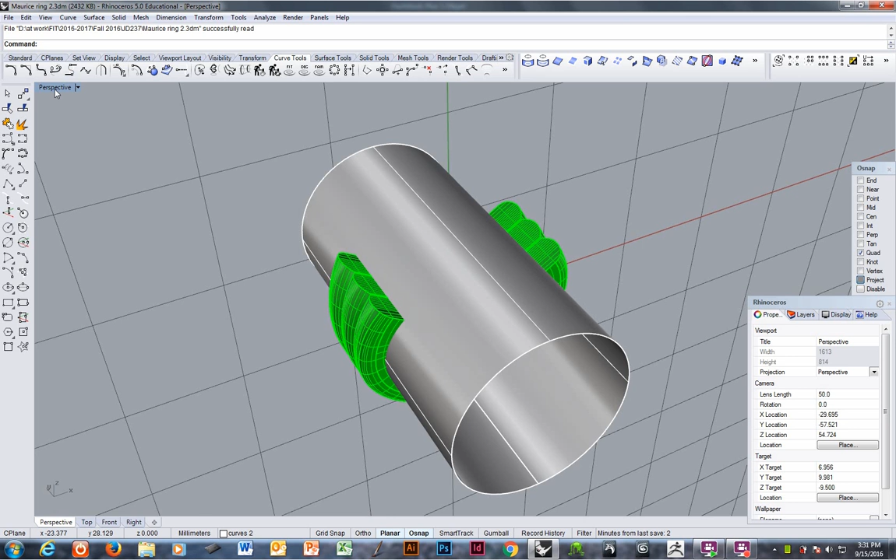Adding another installment to our series of tutorials for Rhino, continuing on with our project, the Maurice ring. Okay, we don't need the ring bore. We have our shank fairly well resolved. I'm going to move that onto a storage layer.

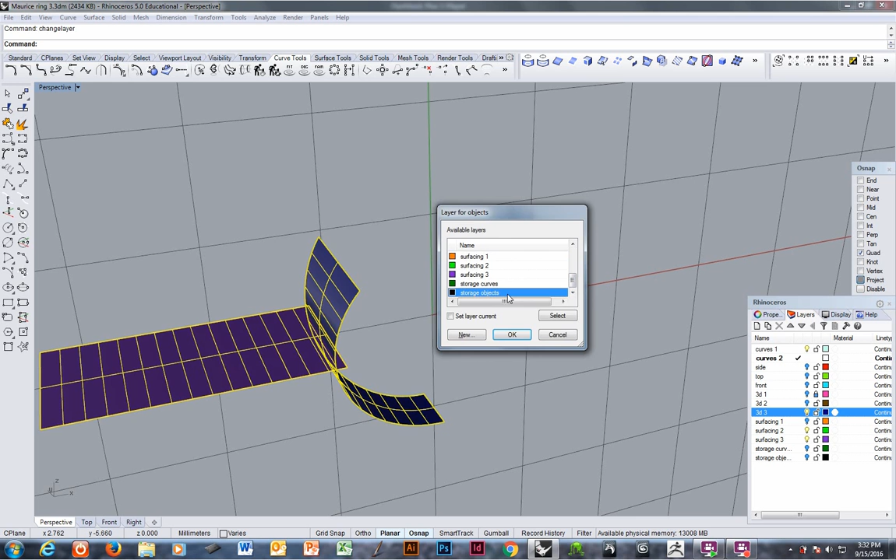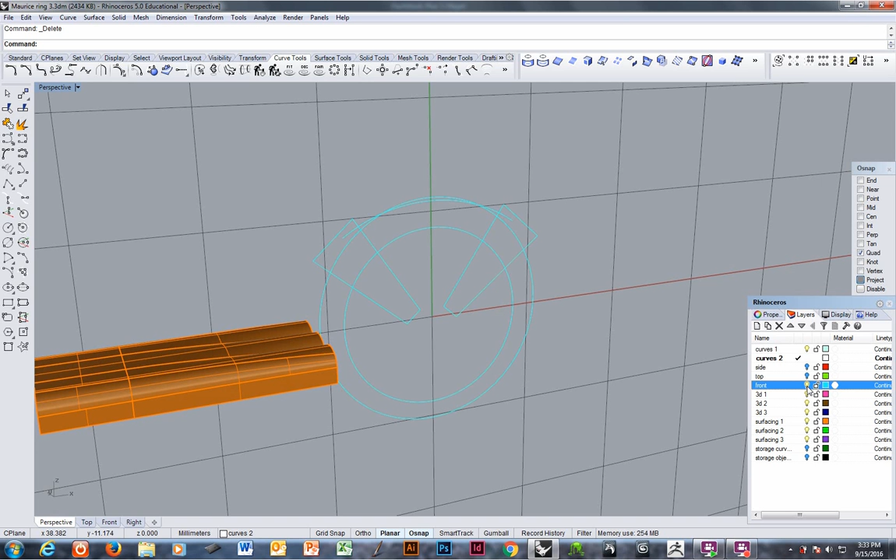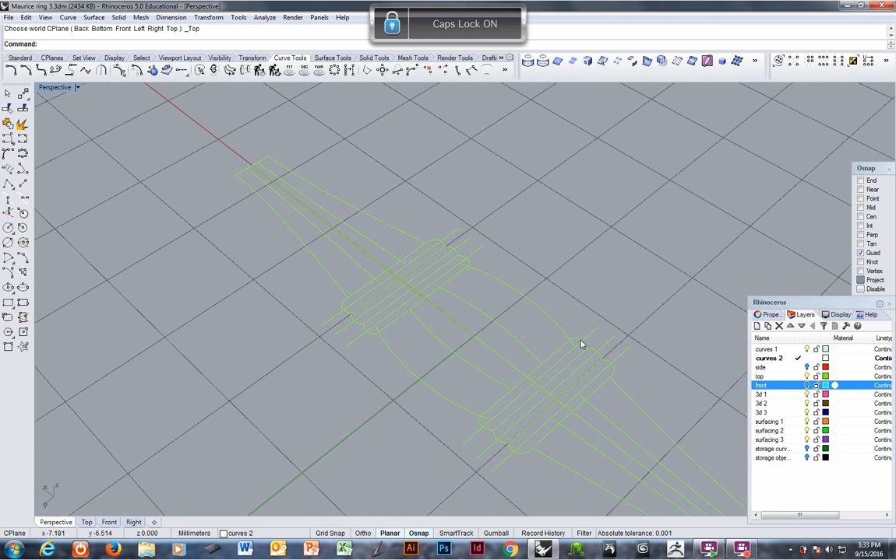The next element we're going to draw is the center section, the head section. We're going to do it in much the same way that we did the other. I turned on the previous curve so I could see a relevant height. Okay, in fact, an easy way to do this is going to be to do an orient command. I want a copy and I want it to scale 3D. Grabbing the endpoints of that section and the quadrants of this simple loop.

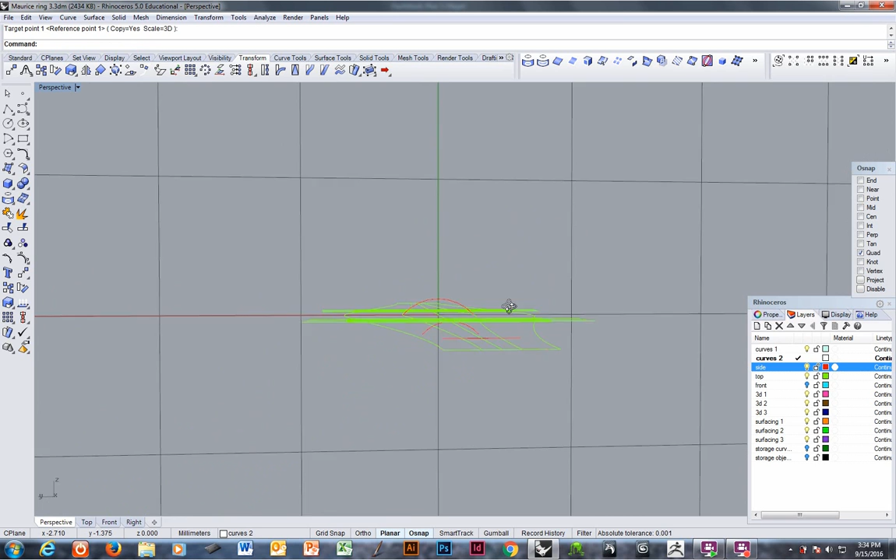That is the same shape, just enlarged and moved in position. Remember, that's what orient will do. Orient will copy, relocate, and scale something all at the same time. Powerful transform. I'm going to look at that in connection with the other flutes and see if I think that is tall enough. I don't think it is. I think I'm going to want a little more extreme.

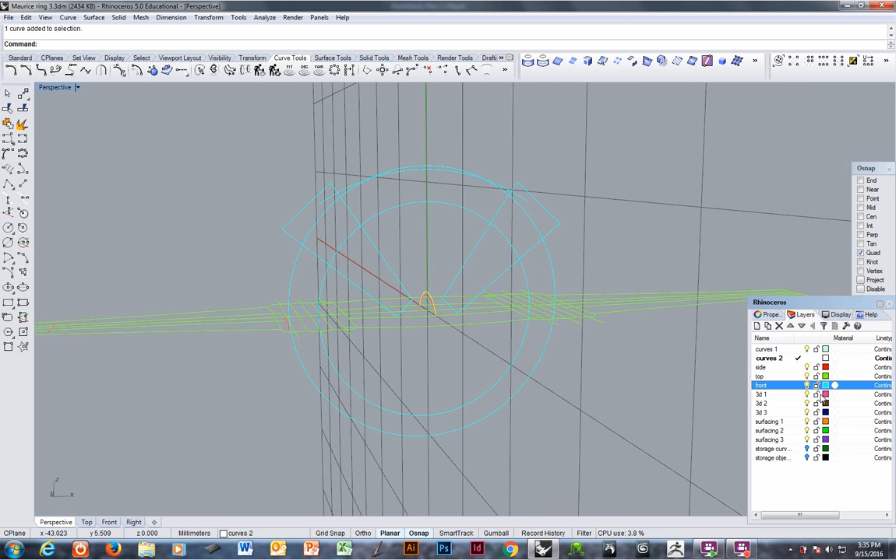I have to be careful though, because the taller these are, when they come into here, the higher this is going to have to be to grapple them. And if this has to be higher to grapple them, it's going to be even higher over here. And that is one of our concerns, the differences here. So actually, I'm not. I'm going to leave that with the original. That's fine.

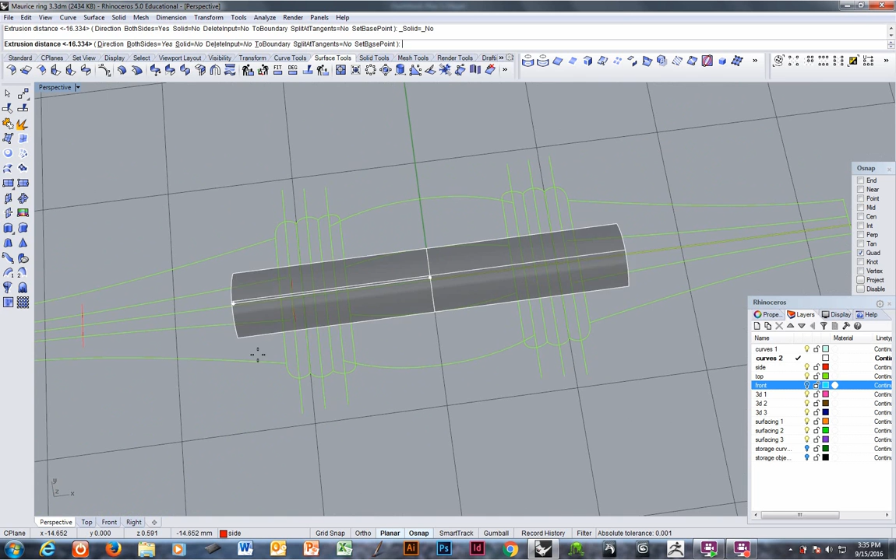I'm going to go ahead and extrude that straight, both sides. Yeah, my bad. I'm going to try and extrude it from the top C-plane. It may not work. The last C-plane, the right C-plane, was better. Yeah, but since it's a planar curve, usually if it's a planar curve, Rhino will forgive. Because I want to make sure that it's big enough to tuck into this cleat well.

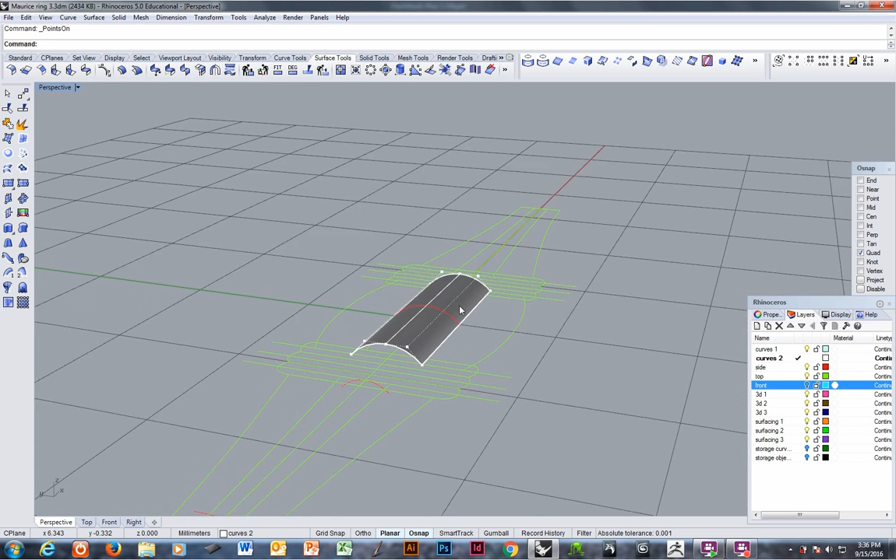I'm going to explode that. Rhino 5, when it makes an extrusion, it actually creates a separate kind of object class in Rhino, which we don't want, because we're going to want to be able to alter this. I want to look at the point structure. It's not bad. I'm going to take a look at the math, F5.

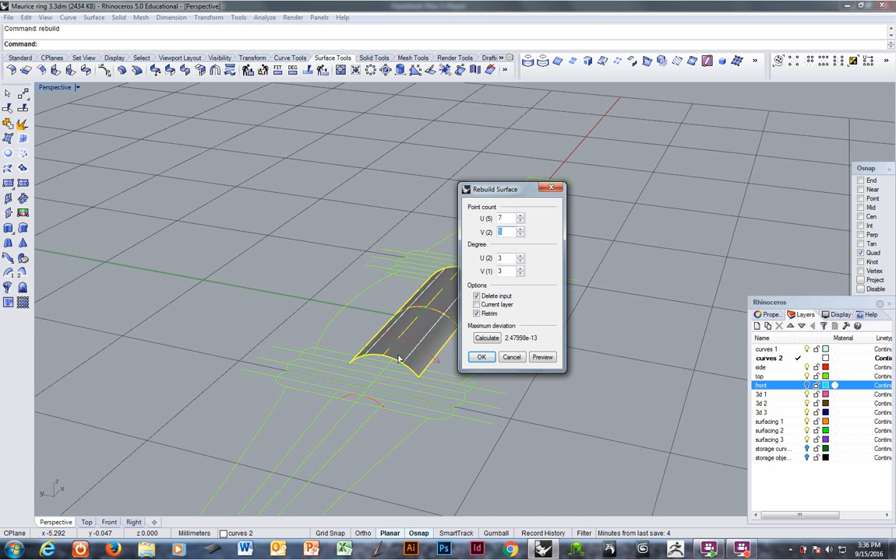It is second degree curvature, which I don't want. I want third degree. No, I mean, it is a third degree. Okay. No, it isn't. It's a second degree. So I want third degree, third degree. I want the U direction, which is coming across this way. I'll make that 7 so that it holds. And in the V direction, that's coming from here to here. I want a center line, so I'll make that 3, which is good. That's what it already is. Essentially the same surface, but with a little more friendly math, because we're going to be transforming it quite a bit once again.

Actually, I already have these outlines coming to this first curve. I'm going to go ahead and scale this back to match, non-uniform scale. 0 is the beginning of my scale. I will grab the end of this extrusion and the end of that cut curve, and just 1 for Y and 1 for Z. There. That'll be the same length as this, which will make my life easier later.

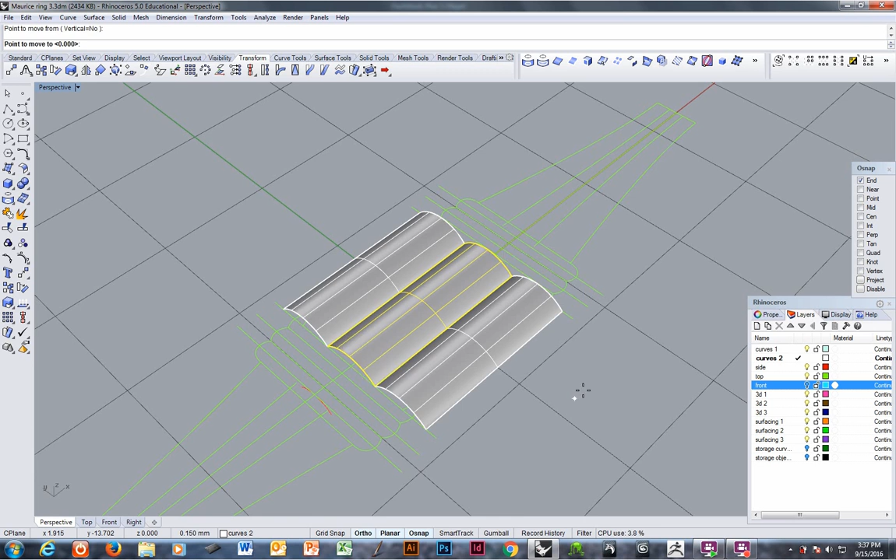Going to make copies with history. And I'm going to check my history. If I move the center one, the other two should follow along. Okay, very good. So there's my basic surfacing for the center section. And like we experienced before, we're going to need to make a fairly sophisticated flow kit to work with that.

We know that we want the base surface to be as wide as this. So I'm going to go ahead and just start drawing the outline. Line both sides, starting from the quadrant. Shift key. Go ahead and mirror that over. And I'm going to

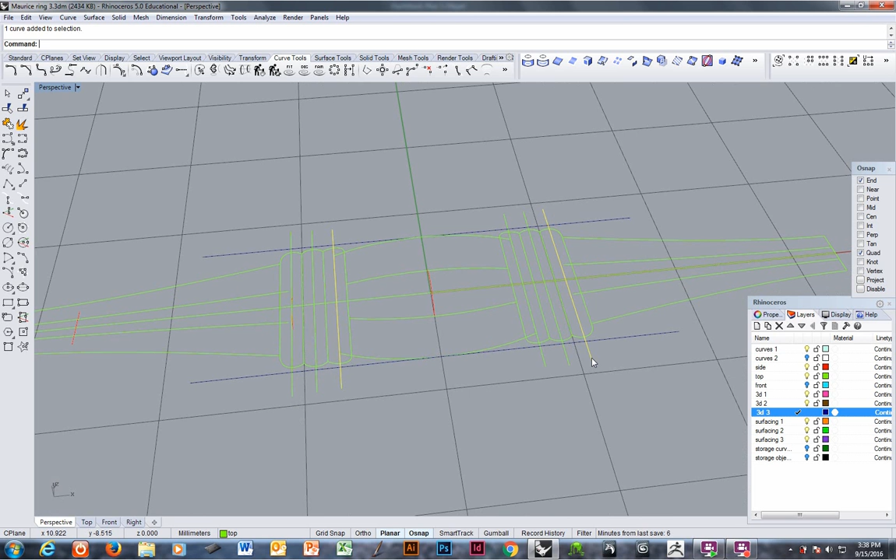grab these two. I want a copy of them on this dark blue layer, so I'm going to copy and paste and change layer to dark blue. Change layer, remember, is called Control D. Copy is Control C, paste is Control V, change layer is Control D. Turn off this top view now. And trim this up using fillet.

That's the shape of my initial surface. I'm going to offset it a millimeter so that I have a flow surface that goes beyond what I need all the way around. In fact, I'm going to go 1.2. Throw away the inside one. This is the curve I'm going to use to make my flow surface.

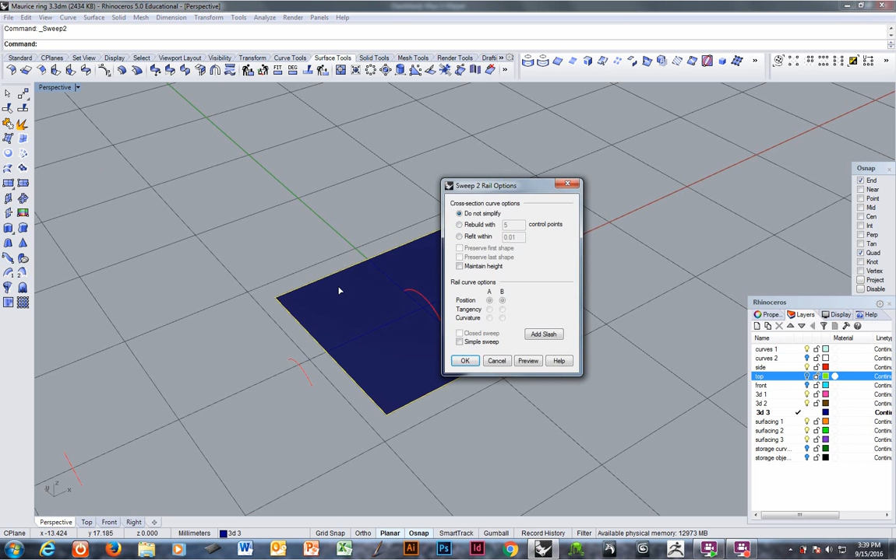So explode it, bi-rail sweep it, throw away those curves, and that's my flat surface, my base surface. Now I'm going to make my three-dimensional surface, my target surface. And to do that, I'm going to do the same thing. I'm going to ungroup these, Control-Shift-G, so I can select them individually. I'm going to do the same thing I did with the other, with the shank.

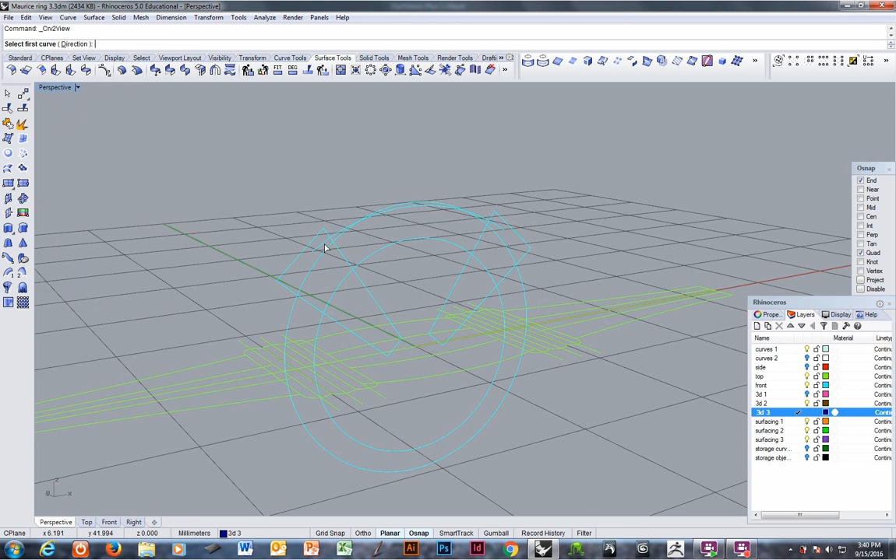Curve from two views, here and here. Curve from two views, here and here. Okay, that gives me what I want. And I do want to have a surface up here to look at for reference, so I'm going to make that. Going to extrude it, front C-plane, extrude both sides. Turn off my two drawings.

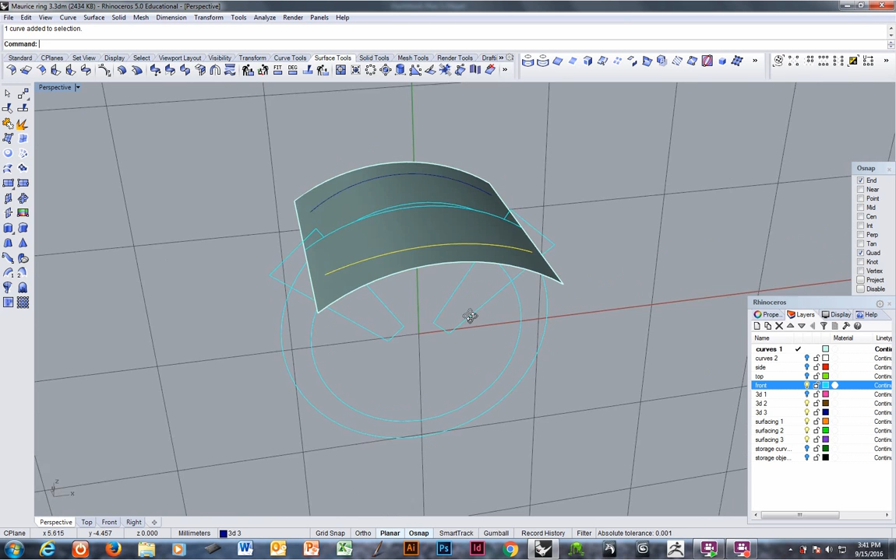Okay, now interestingly enough, these don't reach. And that's okay, because I made that center curve in the view an approximate, so it should be fine. I do need a curve to close these off, though, so I will get that, extract iso curve, other direction, T-enter to get the other direction, toggle, and snap, and snap, trim, trim, trim.

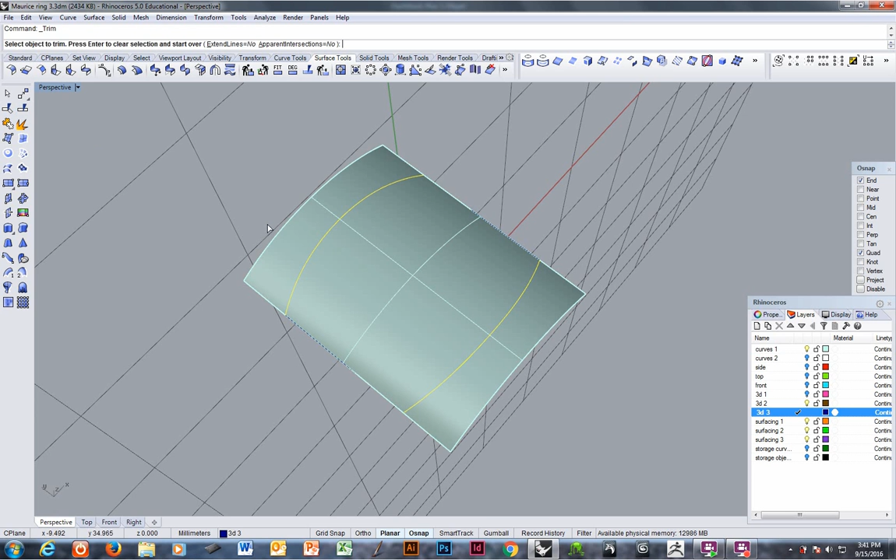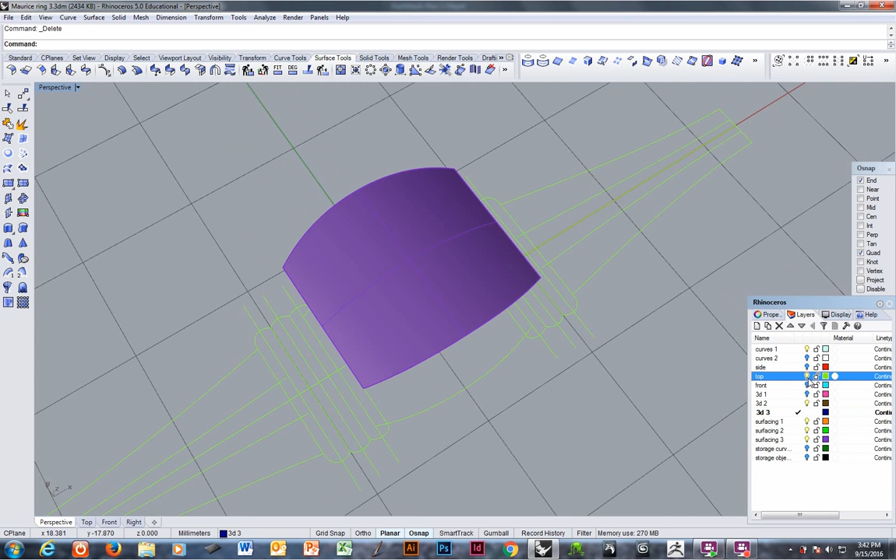Okay, and that will be a good way to measure how close I am to the shape I initially envisioned when I did my drawing. I don't really need the curves anymore, so I'll control that and then deselect the surface. And then going back down to my flat. I am going to offset this 1.2. Going to offset this 1.2. And both of these 1.2.

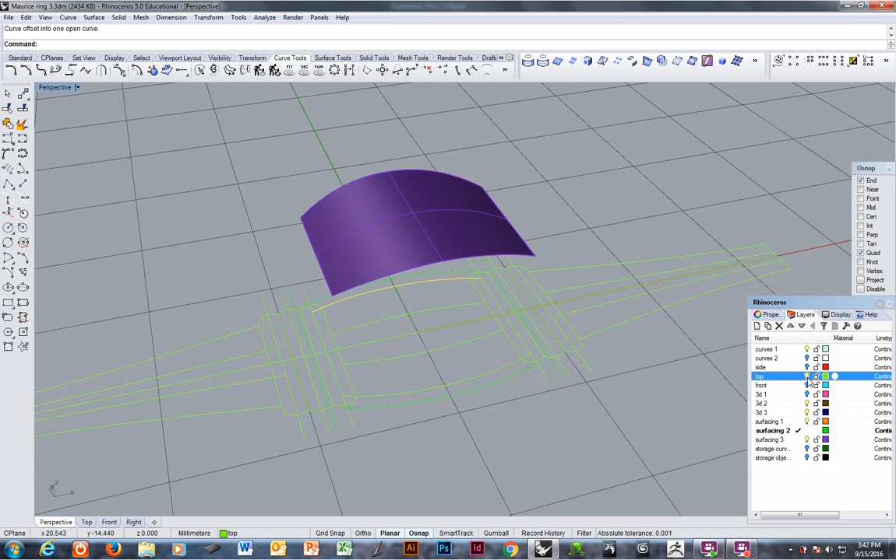Use my fillet. Make sure that these are just one curve. I'm going to explode it. See, those two curves are 6 segments. That's not good. I'm not going to worry about it right now, though. Go ahead and join these into a closed curve. Do my curve from 2 views. This curve and this curve.

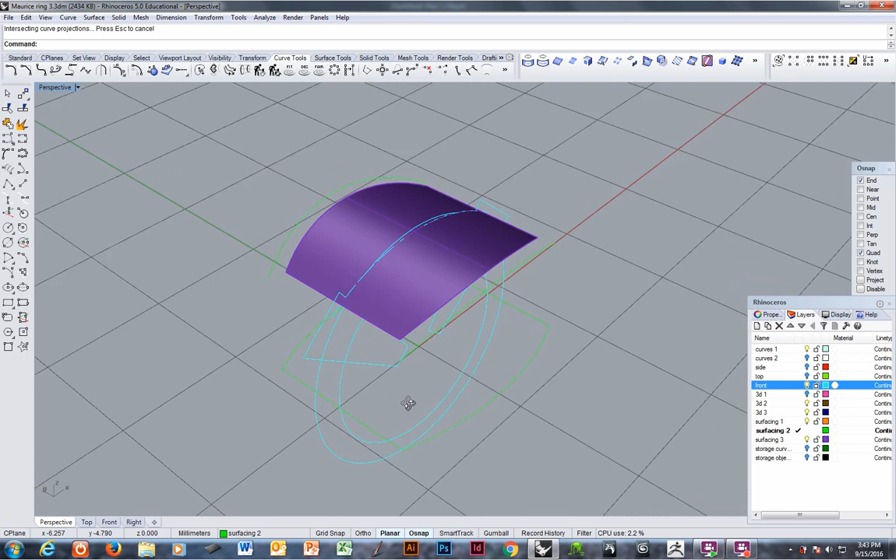You will see that it did not bring the rest of this. It's because it's not long enough. This curve isn't long enough to give me those extra pieces. I need them to be long enough, so I'm going to do an extend curve. Select both of these. Curve, extend curve. Those are my boundaries, so now I just select the curve to extend, which will be that. Explode this. Good, it cannot explode a single segment. Just wanted to make sure I had relatively simple math still.

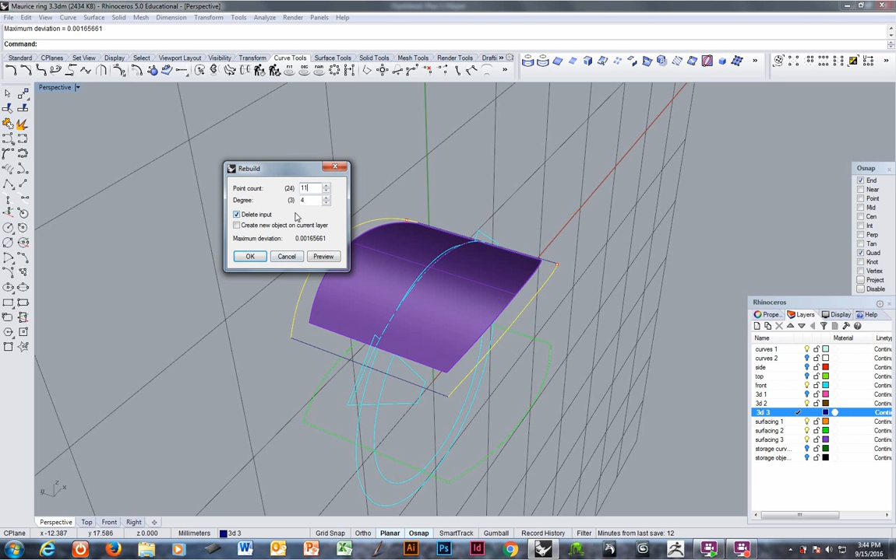Okay, again, curve from 2 views. There we go. This I'm going to explode. There are 5 segments. I only want 4, so I'm going to deselect these 2 and join those together. 3 curves joined into 2 open curves. So one of these was a polycurve. I'm going to rebuild it. All I care about is that there's a control point in the middle, so I need an odd number. 11's fine, and I'll have the degree be 4. That's fine. Looks unchanged.

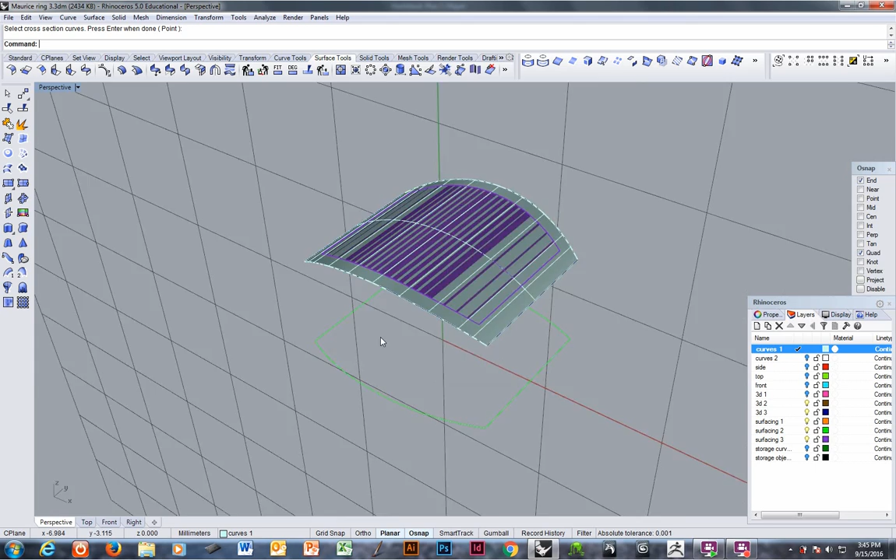Going to do a bi-rail sweep. Oh, hang on. Bi-rail sweep. Rail, rail, cross section, cross section. That looks good. Turn off the guide.

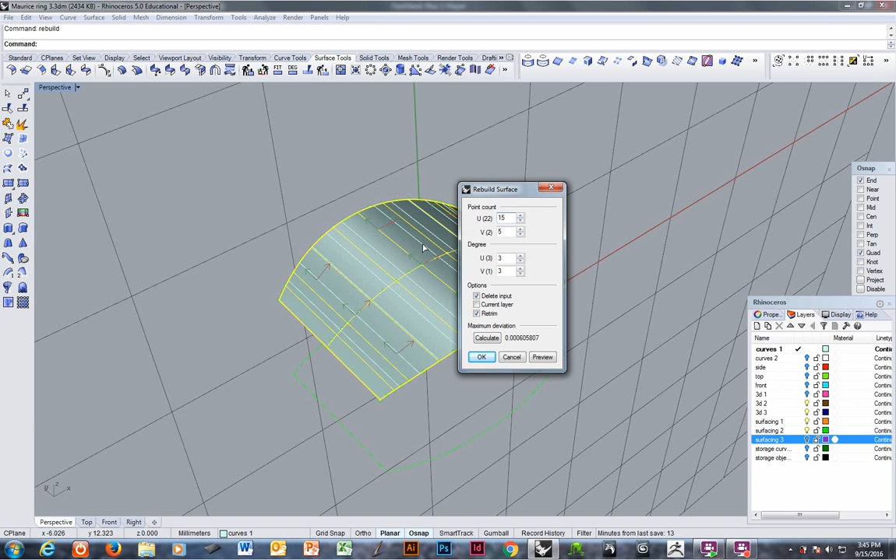Rebuild, so we have even control points. I like the 22. We'll keep that, except I need it to be odd numbered. So I'm actually going to go 19. 19 should be more than enough. Actually, I'm going to take that down to 15. I do want a control point down the middle, so I'll keep that 5. 3 and 3 is okay.

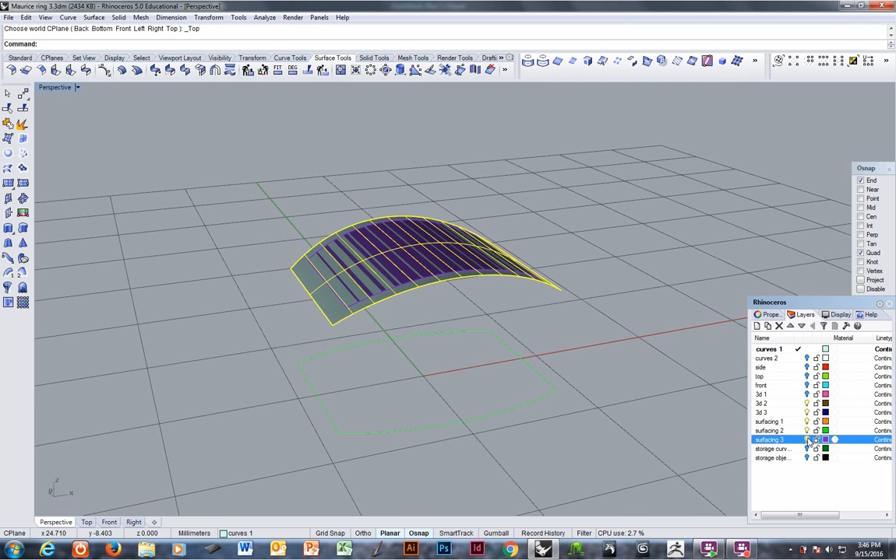Take a look at it from the front, and then undo, redo, to see how much I changed that. Control Z, undo. Looks the same. Control Y, redo. Okay, so that rebuilding didn't change the curvature, which was important to me. All right, let's see what we get. Our flat surface. It's right here. I'll put these on the same layer.

My 3 surfaces. Now, here's the interesting thing. I was supposed to have this offset by 1 millimeter, so that makes me doubt that this surface is legitimate. There should be one that is offset 1 millimeter. Okay, there is not one. Okay, that's very telling because I was supposed to do a millimeter all the way around, and apparently I didn't. Apparently I did it. I don't know where that went. I was certain I had.

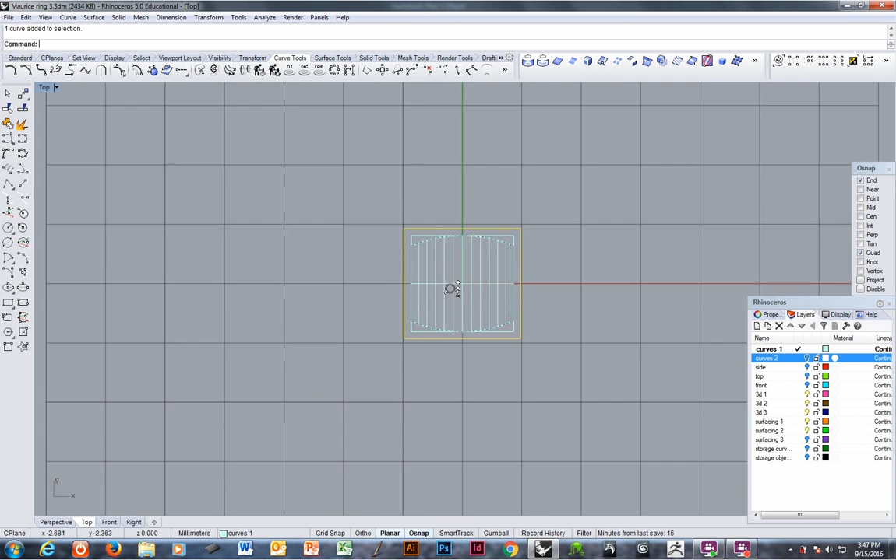Okay, well, it's very important that I do the offset of a 1.2, so curve, offset, 1.2. Except for I don't want that one, I want the straight-sided one. So, duplicate border, offset, delete. This is the curve that I want. If I look at it from the top view, interesting. No. I've got to pause. No, that's right. That is right.

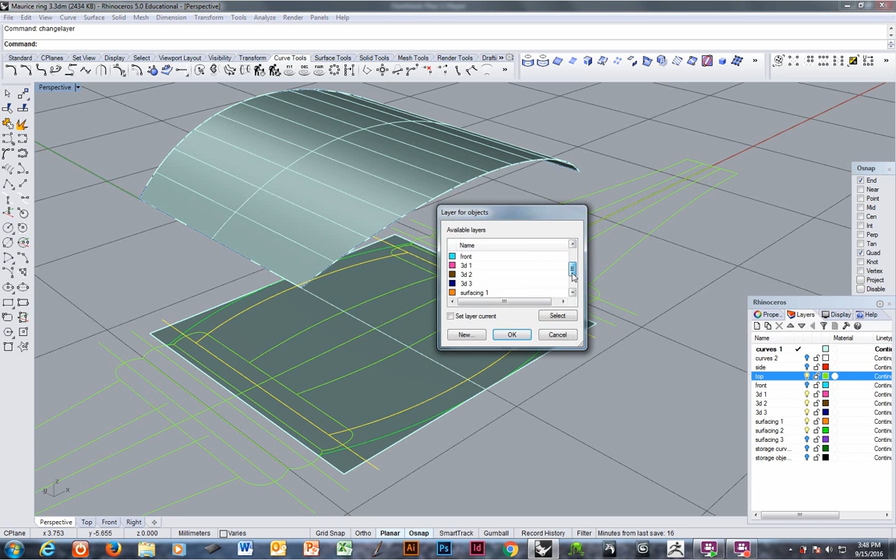Let's take a look and see why I'm confused. Okay, this has already been offset the millimeter, which means this has already been offset the millimeter. This is fine. Sorry for becoming confused, but there's a lot going on, and that's easy to do. Can you see how this was the original shape, and how it has been offset both in the curved version, which I brought up here. It's also been offset as a straight square all the way around. So it's fine.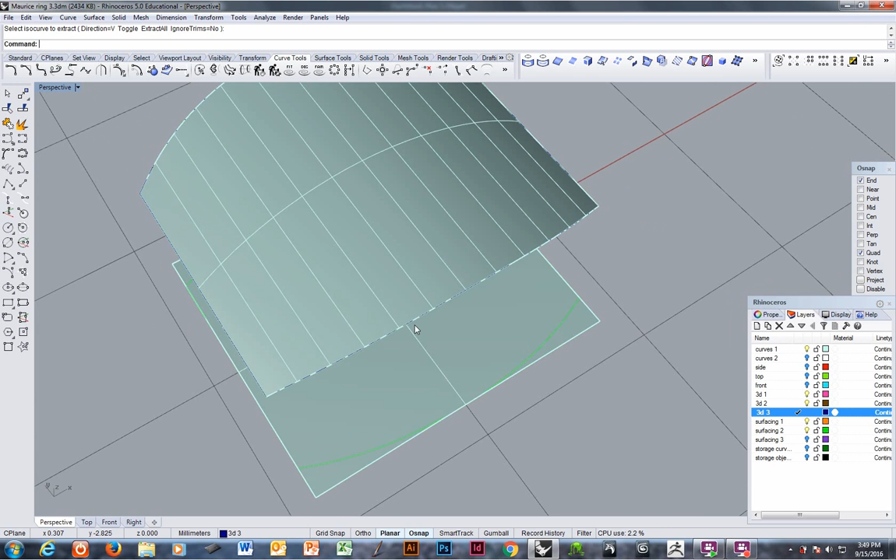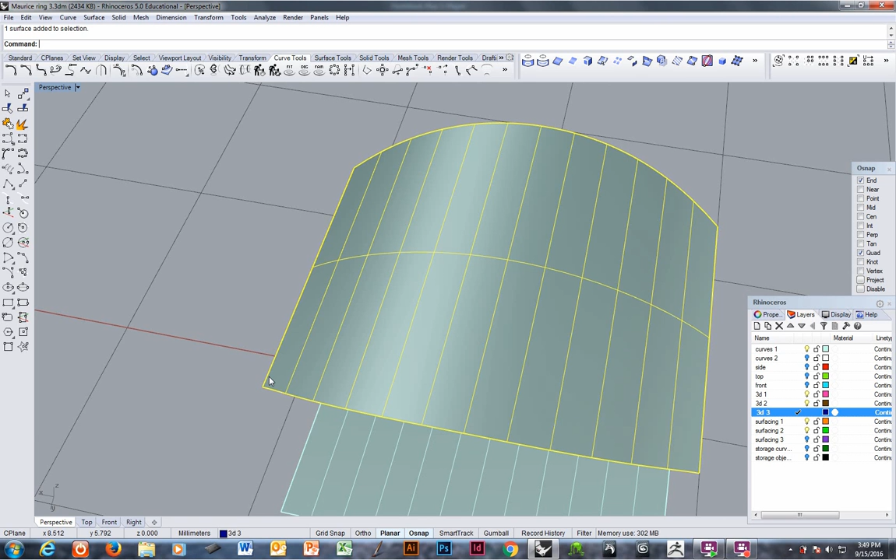Okay, so this is good. I just need to make sure that it matches the math. So first thing I want to check is the grain, the U and V's. U is horizontal, or short widthwise. Okay, same. I want to rebuild this to the same curve math, so F5. It'll remember what I last did, which is what I want, so these two are the same. Good. I'll hide these curves in case I want them again. Group these and hide them. Okay. There's my flow kit.

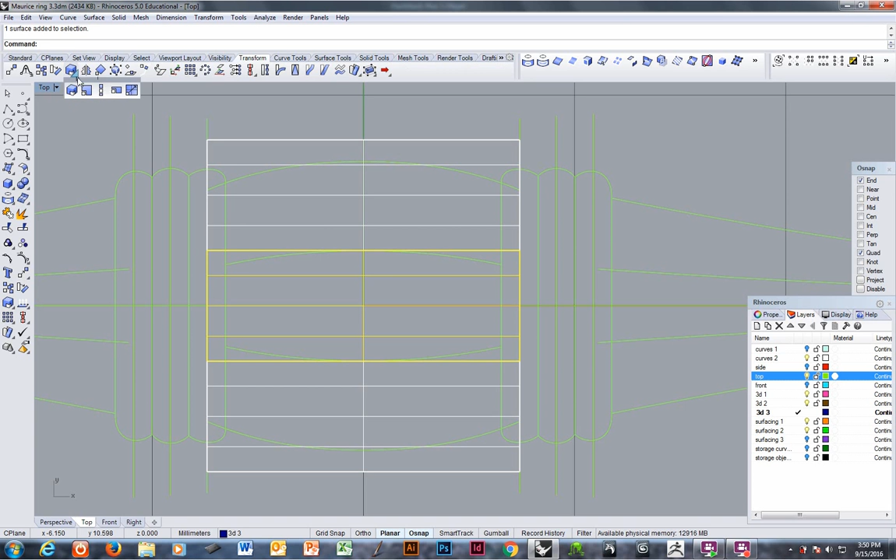I guess what's scaring me is that compared to my drawing, those seem awfully wide. And they are. Okay? They're awfully wide because I made the center one wider than the sides. Okay. Going to my top view. Non-uniform scale. No change here, so 1. And I'll have to do this a little bit at a time until I get what I want. Okay, that's not going to work. This is going to narrow them up.

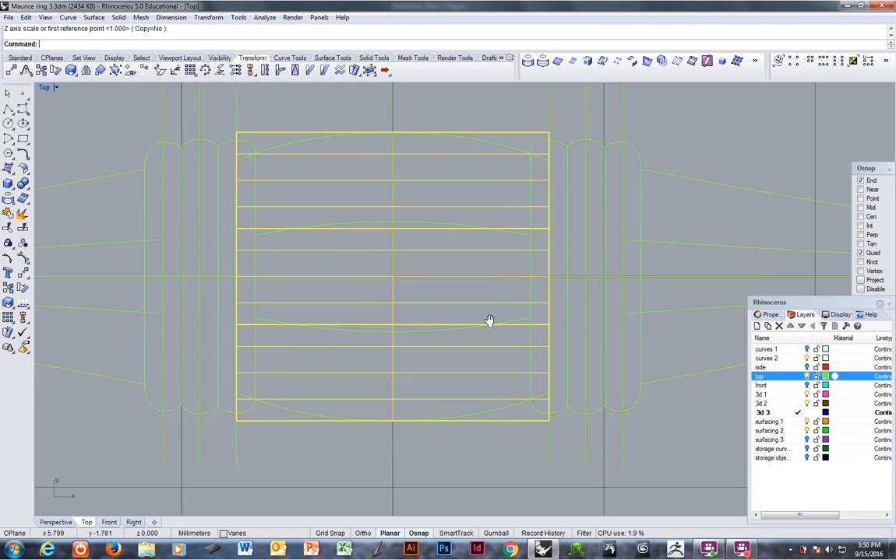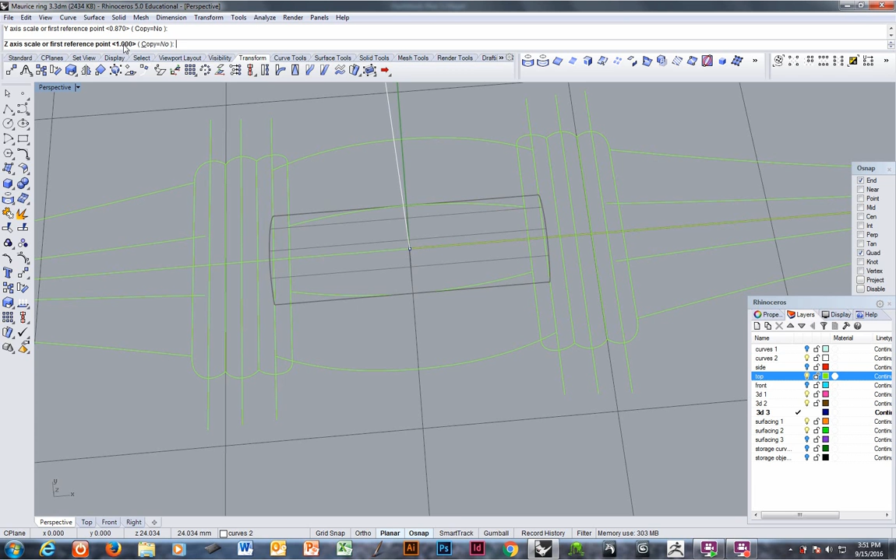So, I'm going to non-uniform scale all of them. One and quad. Z is 1. I know, I broke history. That's fine. That's what I want. Okay, so now that I have that, I'm going to undo, throw these two away, scale this one again using the same numbers, origin point 0. Remember, it will remember what you used last, so it's 1, no change, but this side is 87%. Z is 1.

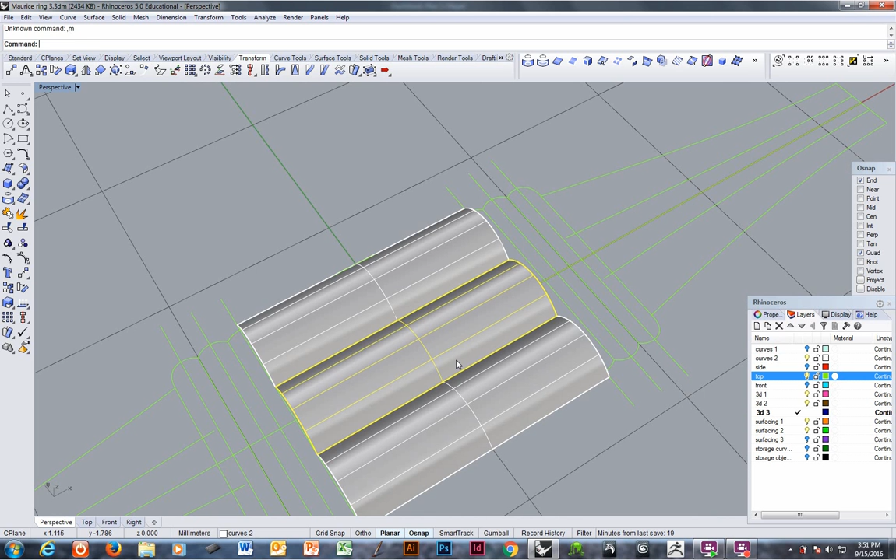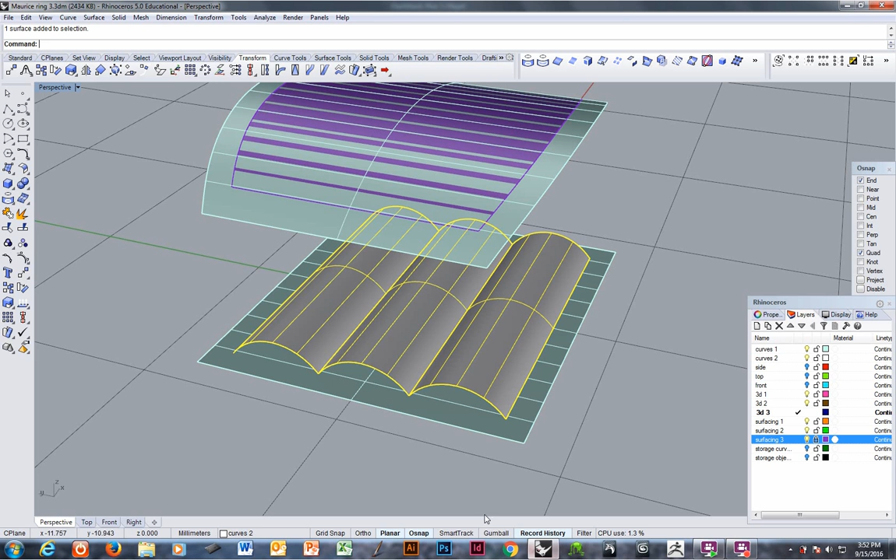And when I copy this with history, and again, I should have something much better. And then if I move this, the others should follow. Yep, history's good. All right, small correction. And now back to my flow kit. Remember, the dark purple is what I want it to look like. So, record history, flow along surface, select a common corner, and there we go.

Now you can see that mine is actually a little more tapered at the very end than what I wanted in my original shape. Going to see how much that matters against the drawing. Actually, it looks good. The only place it matters is down inside of the collet, and I don't think I really want to change that. Oh, unless, hang on. No, it's off. I need to match that curve. Alright, so to do that, I'm going to change this onto a different layer just so I can turn the base off.

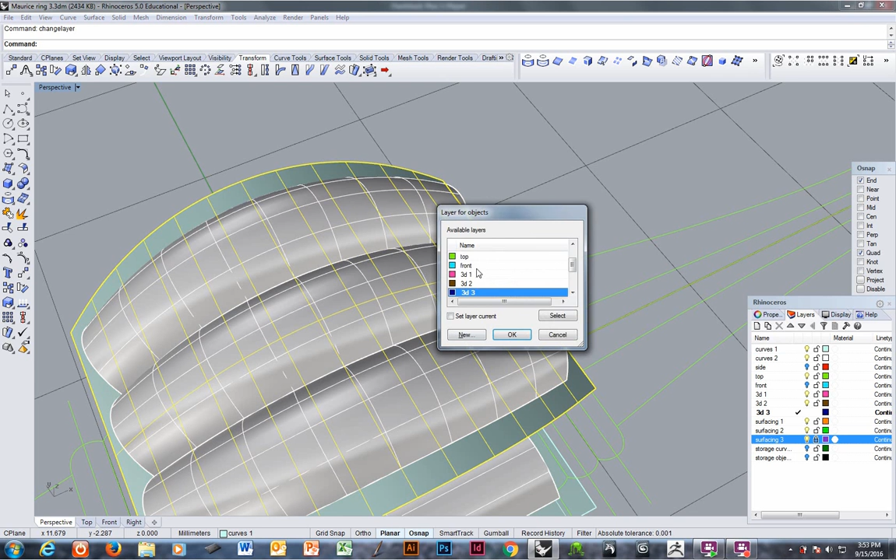Since history is attached, I can turn on the control points here. And I'm going to do some control point editing. I'm going to start with from where I see it departing, which is right here. Here it looks good. I'm going to grab it on both sides. That's why I wanted a center point, so that I could have it be symmetrical. Origin point is 0. I don't want to change this direction, so that's a 1. I want to change this direction. I'm just going to do a little bit. And then 1 for Z.

Enter. And I'm going to look and see what that did. Can you see how it took it in quite a ways? Actually made kind of a kink. I don't want that. So, undo. Try again. Nothing here. This was 98%. I'm going to do 0.99 and then 1 for Z.

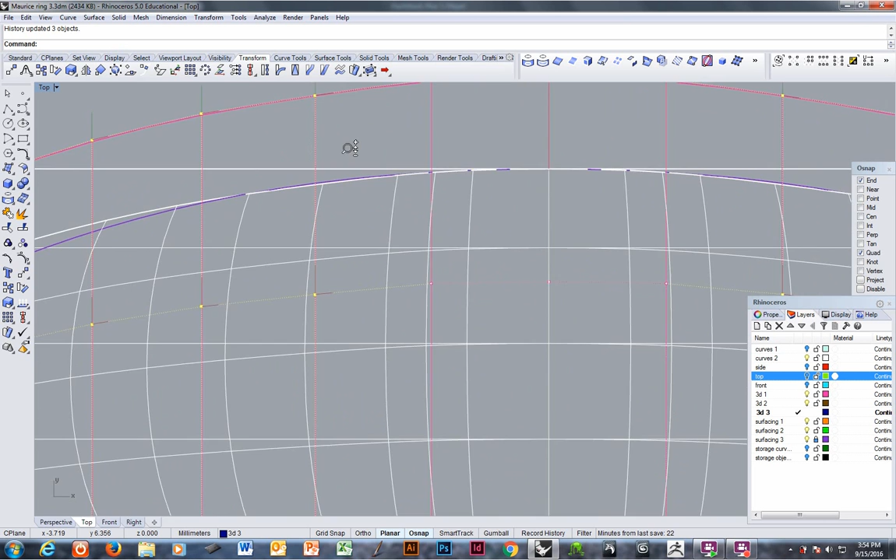Okay, that's not bad. I'll leave that. I'm going to subtract this row of points, holding down the control key. Remove that row of points, and I'm going to go back in and do a non-uniform scale again. I'm just going to select the same values again and again. 0, enter, enter, enter. Doing each one 99%.

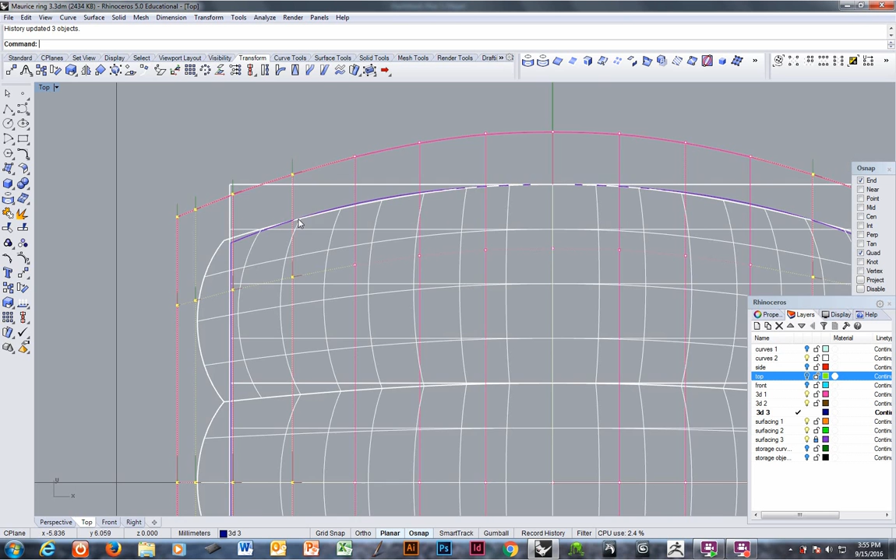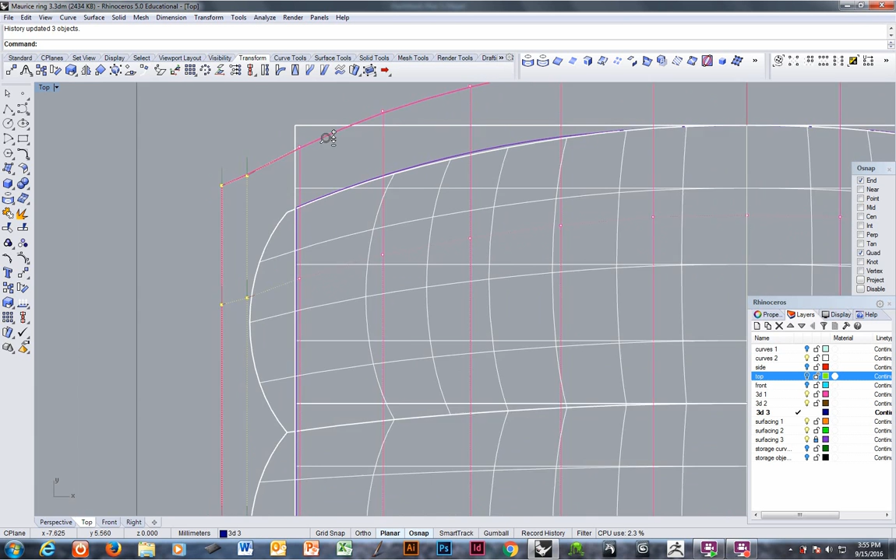Now you can see that this one is kind of hanging on. That's right where the other two are a little bit too much. That one's about right. Okay, so these I need to scale more. 0, 1. I'm going to type in 0.98 and 1. That's pretty good. I'm going to pull out this next row and non-uniform 0, and I'll keep that same 0.98. It's a little much. 0.99.

That looks good. Now I have to go back and expand some of these. I need this row, 4th row from the end, and this row. Non-uniform scale, 0, 1, and then this is going to be 1.01%. Nope. So instead of typing in now, I'm going to go to my gumball. And that way I can just grab a hold and do it interactively. Okay.

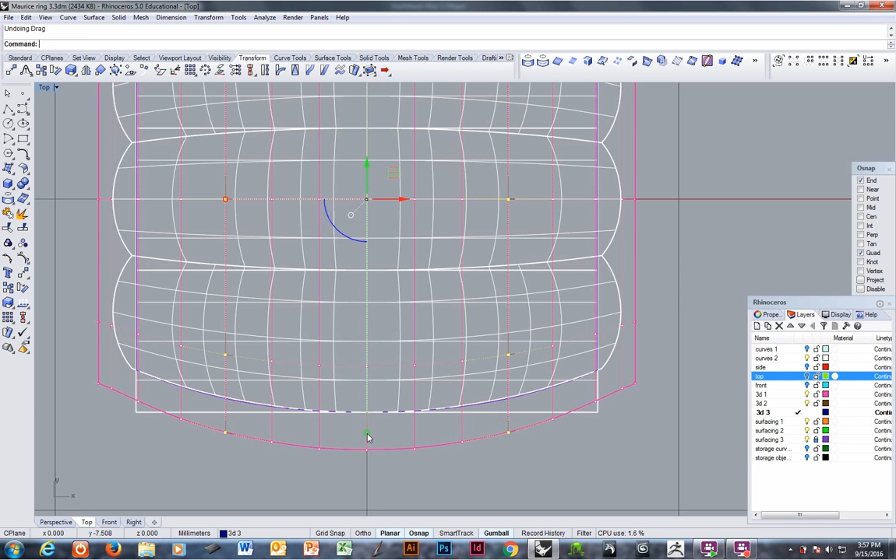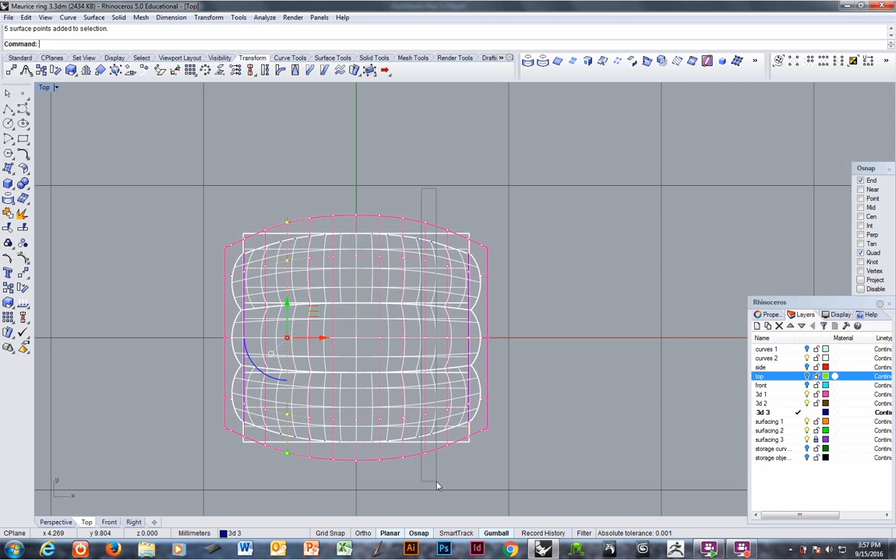Now I want these two rows. Double check, 1, 2, 1, 2, okay? Same idea. Zoom in a little bit. That's pretty good. Gonna grab this row and non-uniform scale it. Looking good. Actually going to go back to this last row. Scale it back down a little bit. Okay, and I can keep playing with this, but I think that's sufficient for what I want.

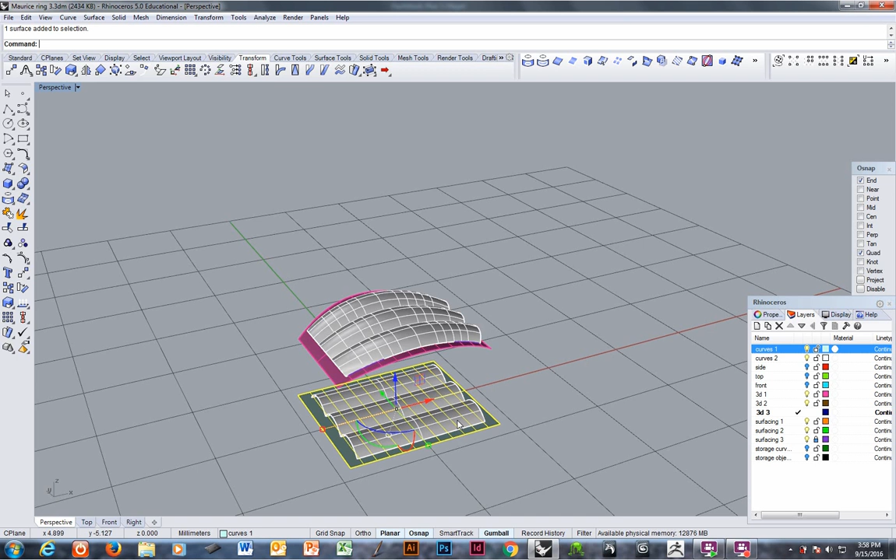So now I have a flow kit that works. These two surfaces work together to throw this into that. That's all I need to know. Get rid of gumball. So I have that portion ready to go. I can throw these away now. I don't need this little reference surface on the inside. I've already proven that I'm good there. So I'll hide that.

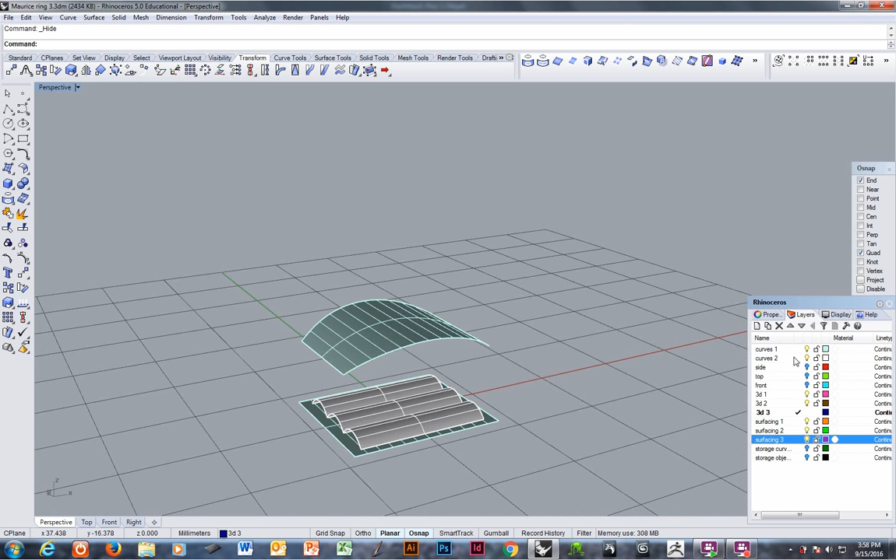I'm going to extrude straight down. Before I do that, I'm going to do what I did last time. I'm going to Control-C to copy these to the clipboard, and then I'm going to group these together and put them on the storage layer to protect the history. Then I'll paste back in the others, which will now have no history, and join them.

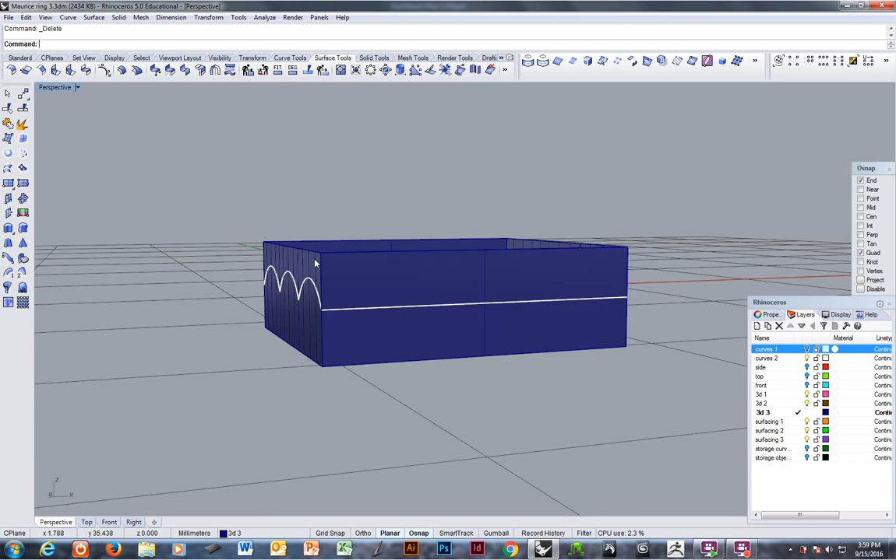And like we did last time, I'm going to do a duplicate border. You see how that border has humps, which is not good. I'm going to project to C-plane, which is Enter. And yes, delete input objects. Going to extrude from that. Both sides, give myself some depth. Delete the curve. Use these to trim away the top part. Join them together. And confirm how this is looking.

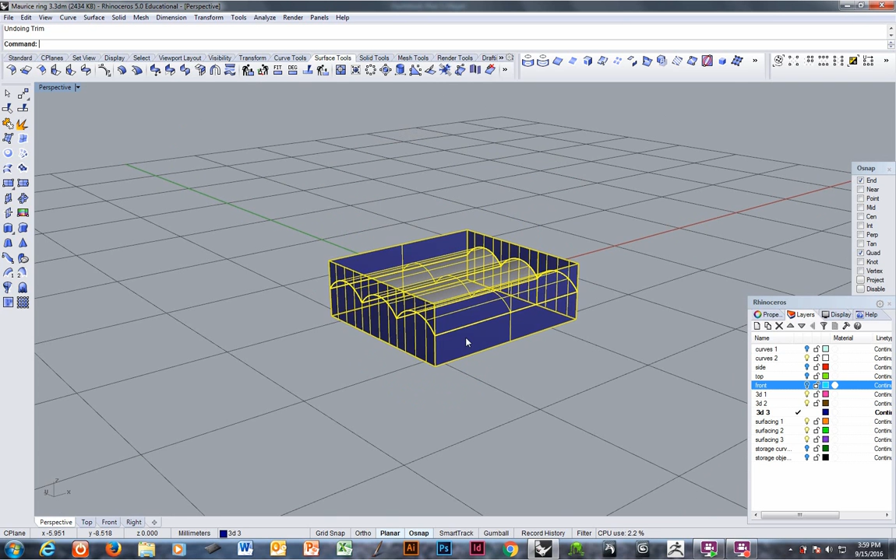Flow along surface. I'm not even bothering with history right now because I just want to see what I've got. Okay, that is not deep enough. I need to come down considerably deeper. So, undo, undo, undo, undo. Do the extrusion again. Nice and deep this time. Throw away the curve. Trim away the top. Join it together. Flow.

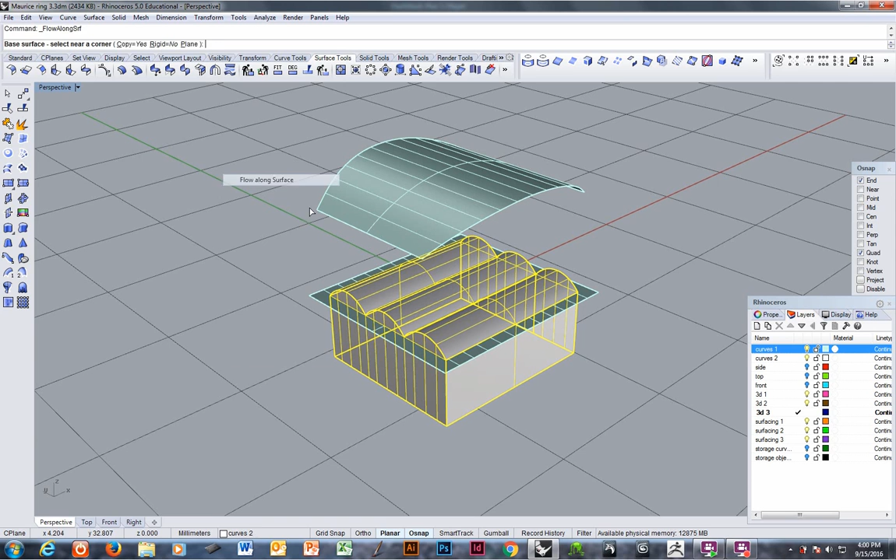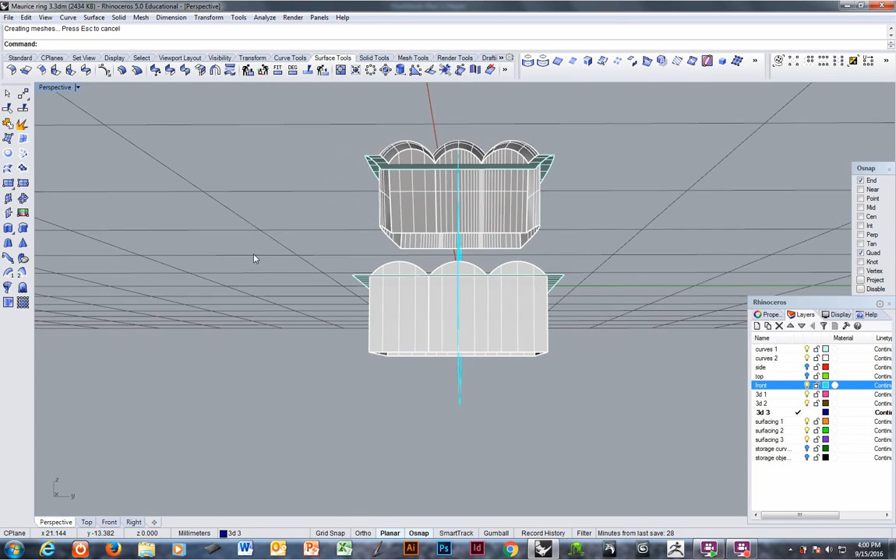Check that out along the finger. That is plenty. More than enough. Okay. I like that. Now, there are some things I don't love about it. If you look at it from the side, it'd be a little bit more graceful if this tapered inward a little bit. Bring back our side view. To have this be swept and have this be straight like that is not very nice.

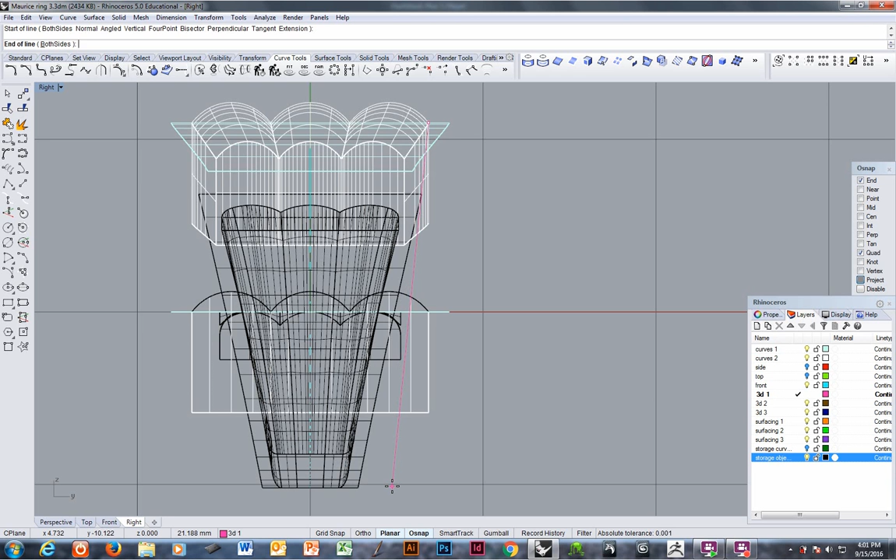So I'm going to reverse engineer. Quad. I'm going to project to the C-plane so it ends up flat on that C-plane. And I'm going to draw what I think is a nice curve. Not as steep as the shank, but certainly has some taper to it. While I've got that, I'm going to trim it off with the inside finger bore.

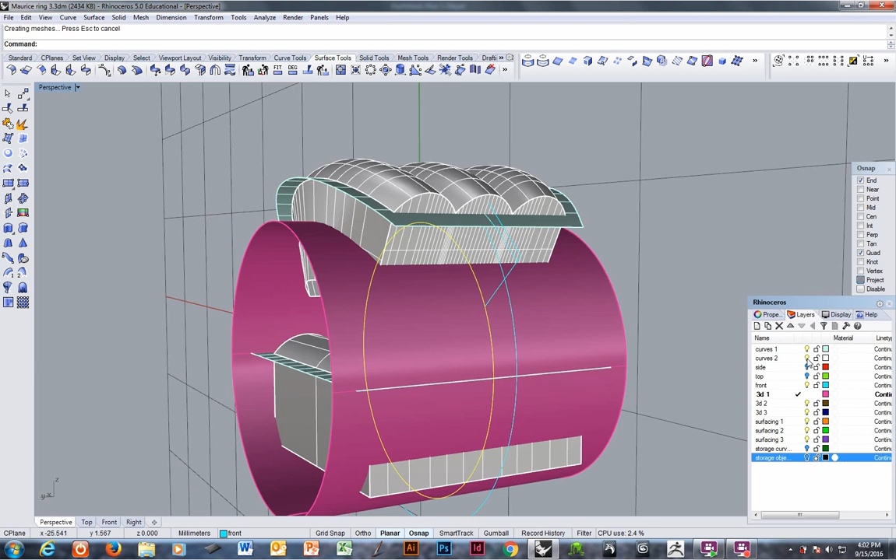Okay, so we have this little piece of curve. Now what I can do with that is reverse flow it. Transform flow along surface, grab this corner, and there it is.

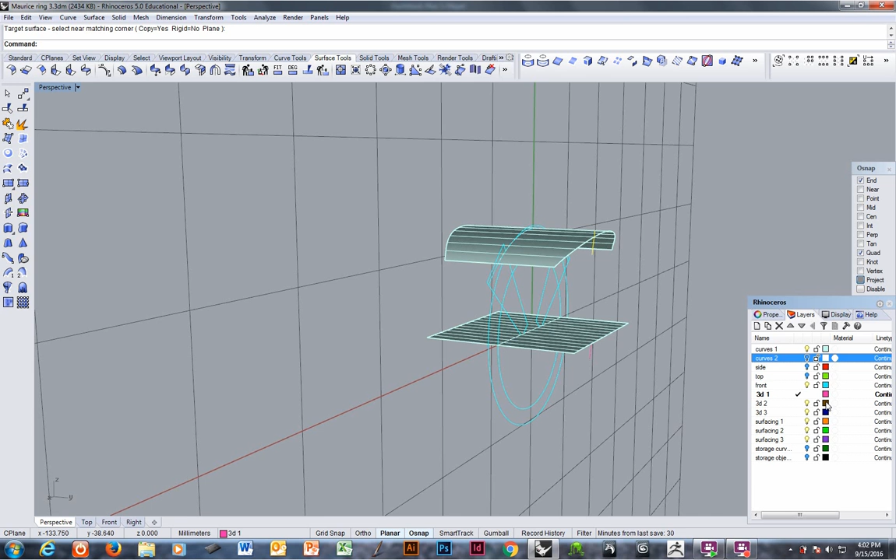That's helpful because it shows me a depth, but it also shows me that angle that I want. Now that I have that angle, bring back my surfacing, throw these away. I'm going to surface this at that angle.

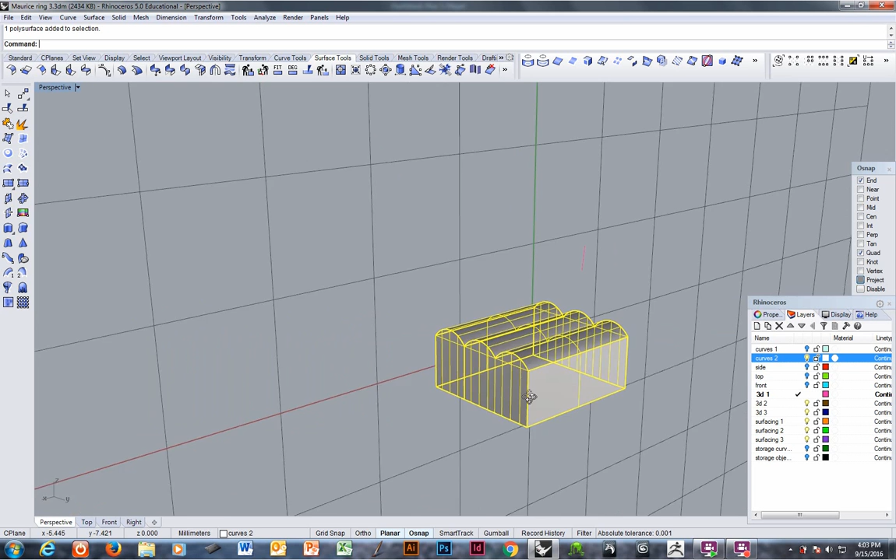And the way I'm going to do that, I'm going to come to the right side. I'm going to extract surfaces. I'm going to take these pieces off, this piece off and this piece off.

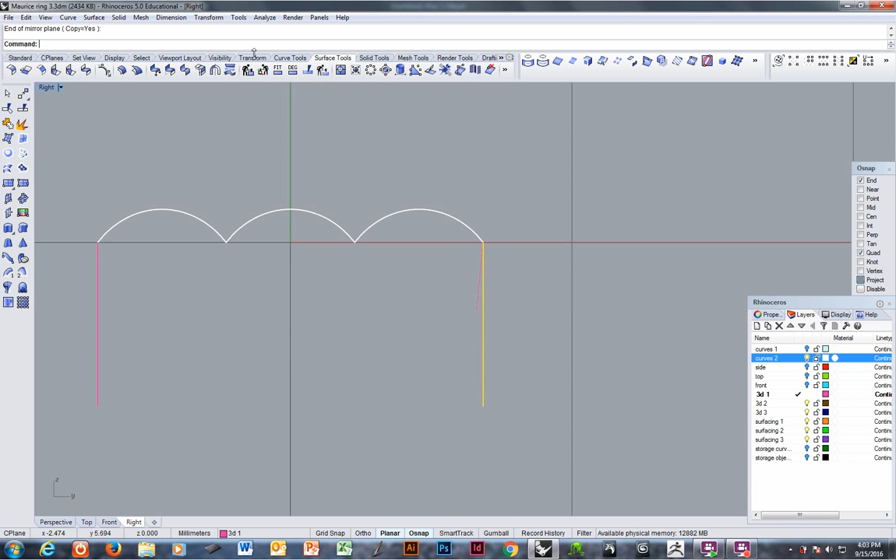I'm going to record history and mirror it over. Then I'm going to rotate it. See how that worked on both sides?

It's fine. Going to do a loft along the bottom. Grab these two edges. Join these together. And cap planar holes. I just broke history on that mirror, which is fine.

Now I have a nice little solid object. I know that I need it to be deeper than this curve, but I don't need it to be this much deeper.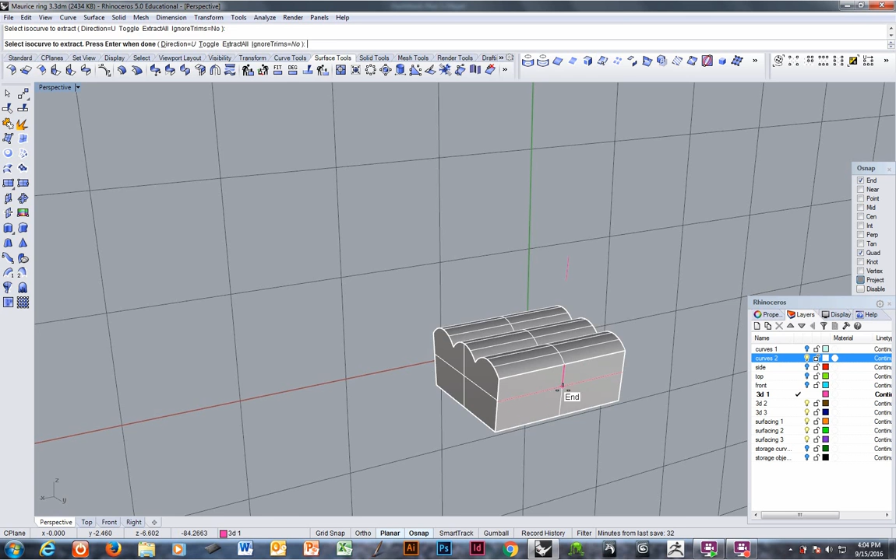So I'm going to do a cutting plane, and move it a little closer to that. Check its direction. I'm going to use it for difference, so Boolean, so I have to make sure that it points towards what I want to keep.

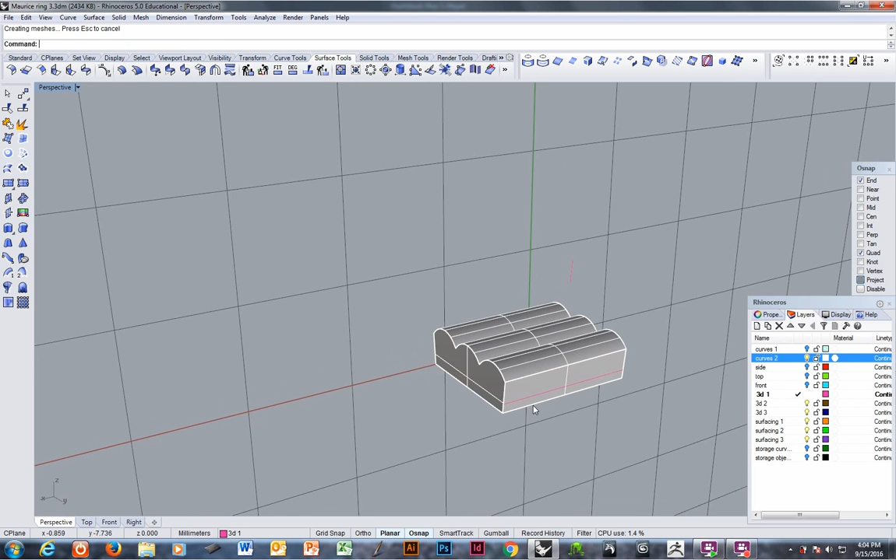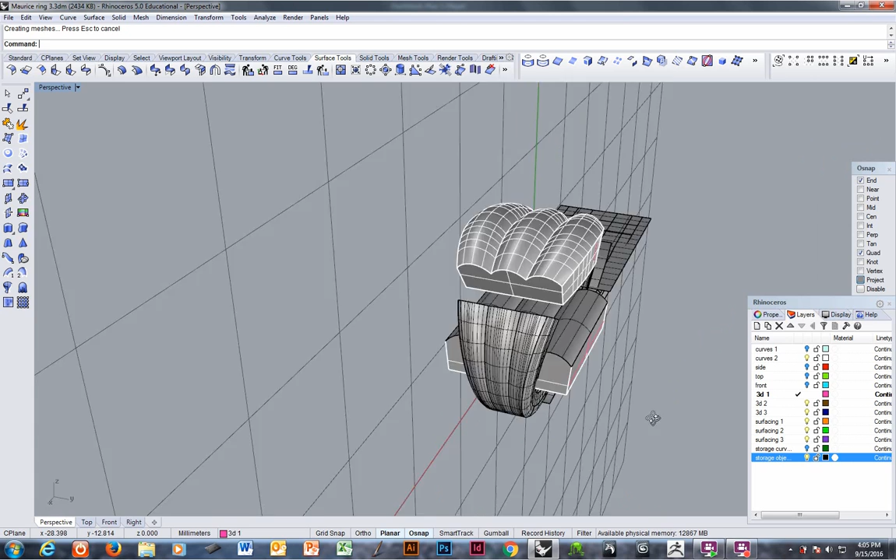And try flowing this. Still not bothering with history. See, that's more elegant. That's okay. That's all right.

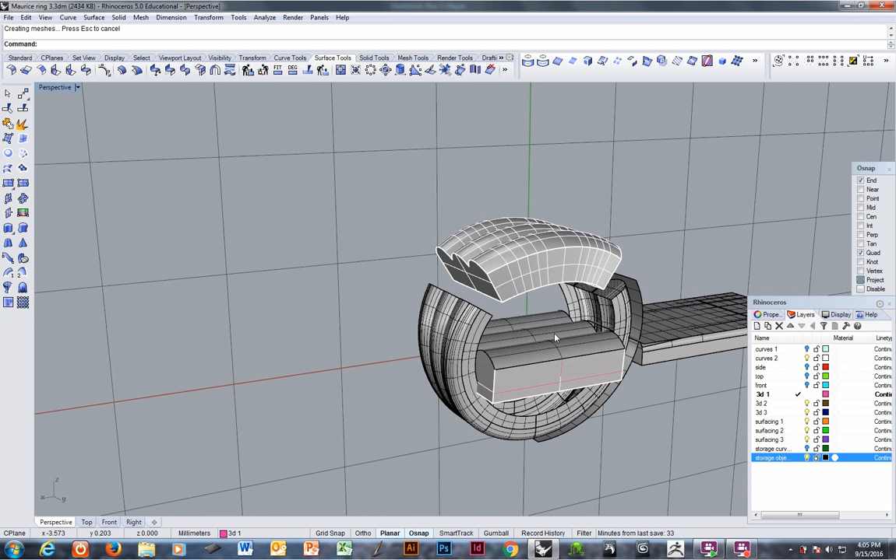Okay, I'm going to want to fillet the outside corners on these outside flutes because I don't want a corner there. So I will do that next. I can do it here and flow it up, but I'm going to get more dependable results if I just do it up here on the flat piece. Solid fillet edge.

Let's see what one looks like. Not much. See what 2 looks like. Didn't work. Let's see what 1.5 looks like. And we'll compare that to that front view, see if we're catching any problems. No, that's fine.

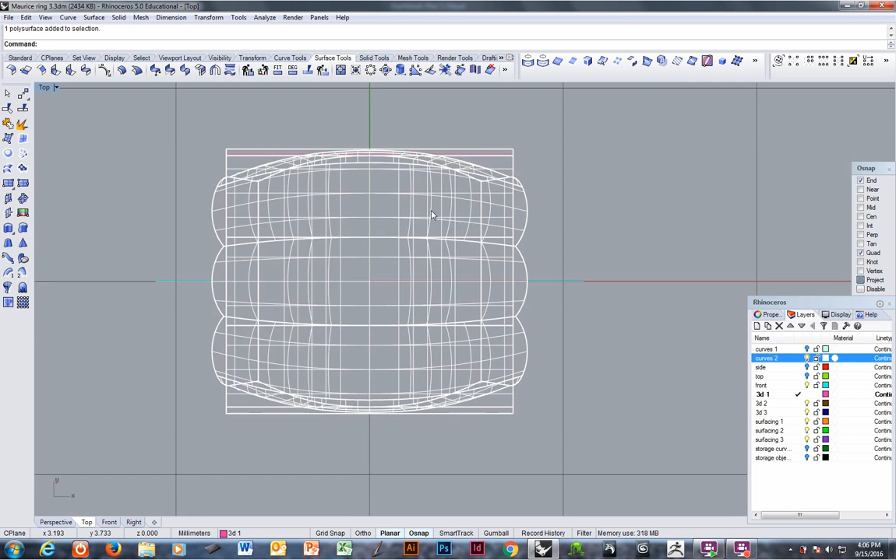Do the same thing here. I want to see how much that changed the width from the top. I can actually see it because I can compare it to the originals. Very, very little. That's all right.

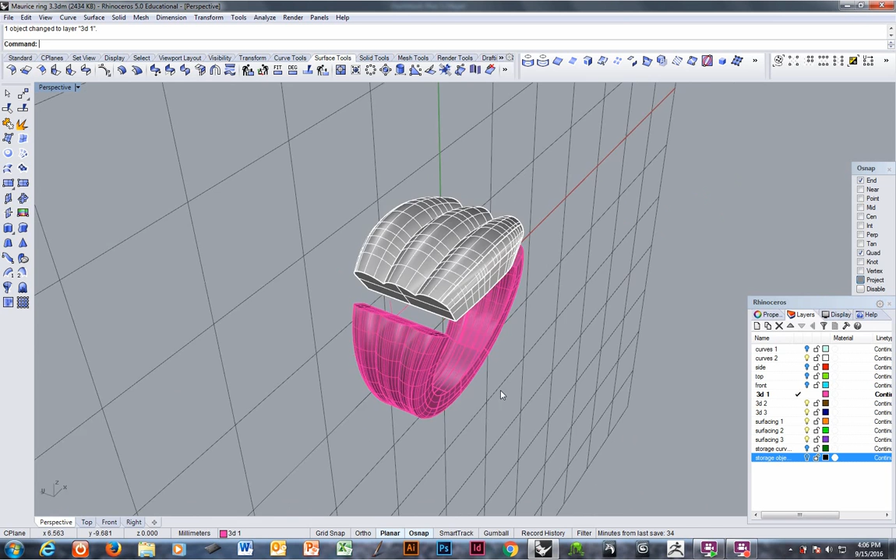I'm going to probably end up hiding this, or put it on the storage layer. I'm going to copy and paste this in, change it to a different layer, just so I can bring that shank in and still leave the other original on the layer for safekeeping, on the storage layer.

Okay, I need to take a look at this now and decide either this section has to be a little wider, or this section has to be narrower. And I will make that decision by looking at Maurice's ring.

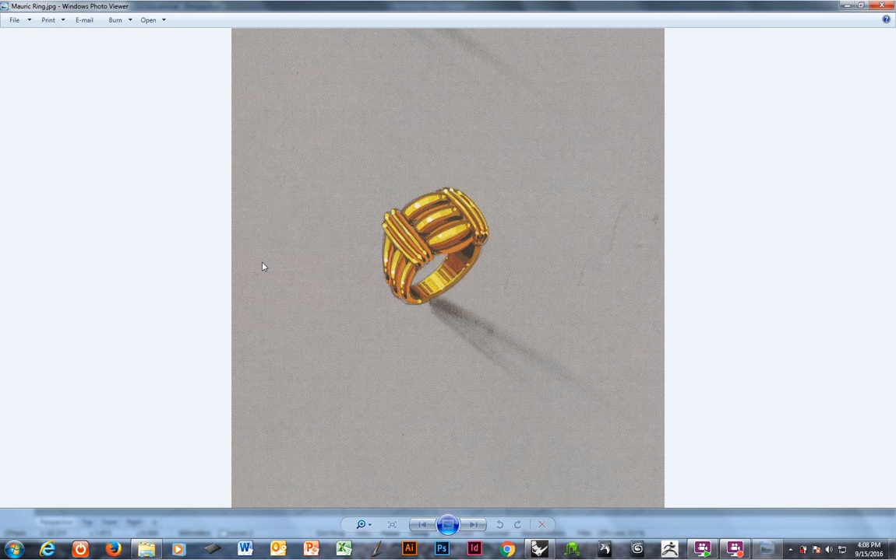So here's Maurice's ring. Here's mine. I can E-map these in yellow gold to give myself more of an effect.

Okay, I'm leaning towards a couple of things. I think that with Maurice's ring I would narrow up the shank, but I think I might also need to tuck these in more. I'll start with narrowing up the shank.

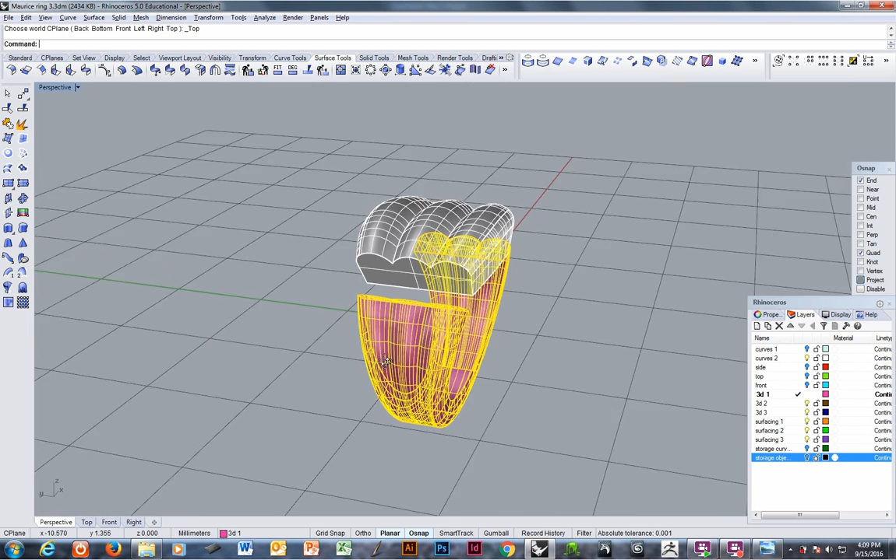So I'm just going to do something as simple as a non-uniform scale. Although I could do a taper. If I do something as simple as a taper...

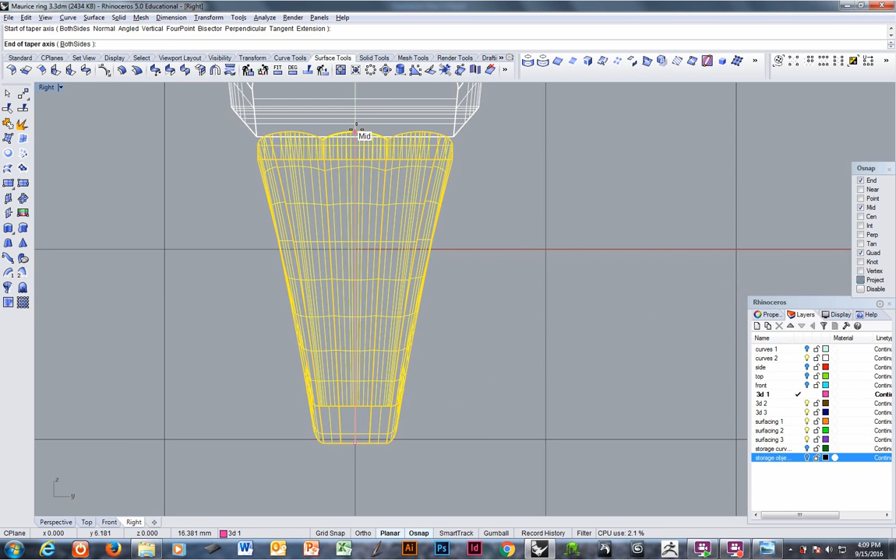Once again, I want to start with the part I don't want to change, which is the bottom, and the part I do want to change, the top. I want it infinite, I want it flat. That will taper all those uniformly, and that's a good representation of what's going on in Maurice's ring.

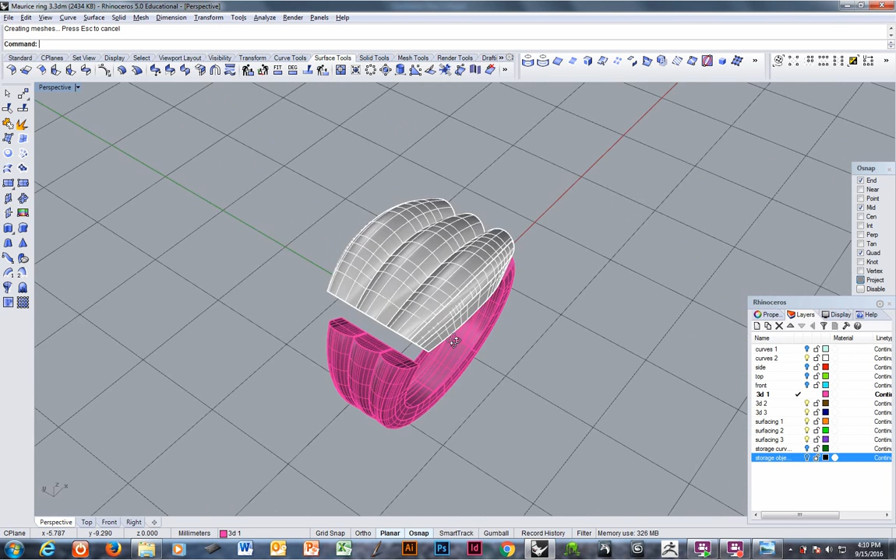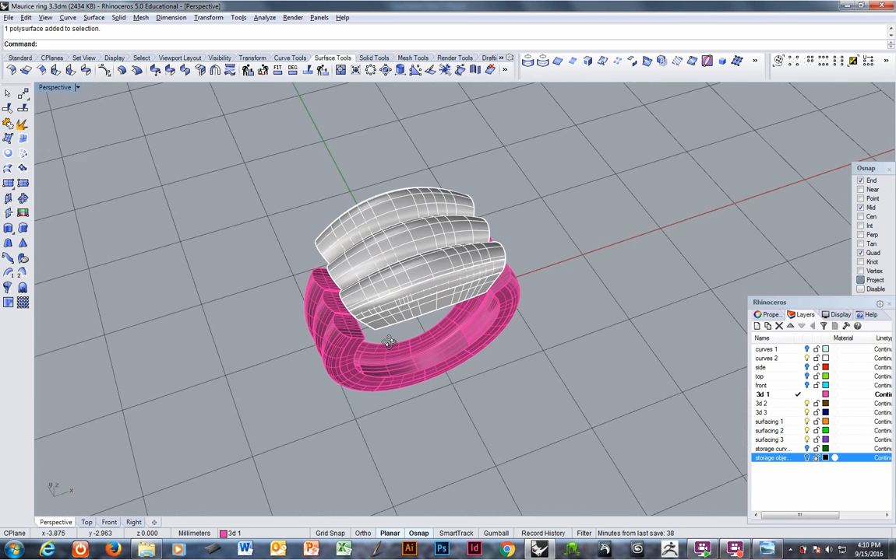Okay, the other part is going to have to do with the tapering of this bulge, which I would like to tuck in more. It's going to be hard to see that though, until I have the cleats. So I'm going to end this tutorial and resume working on the cleats. Thanks for watching.